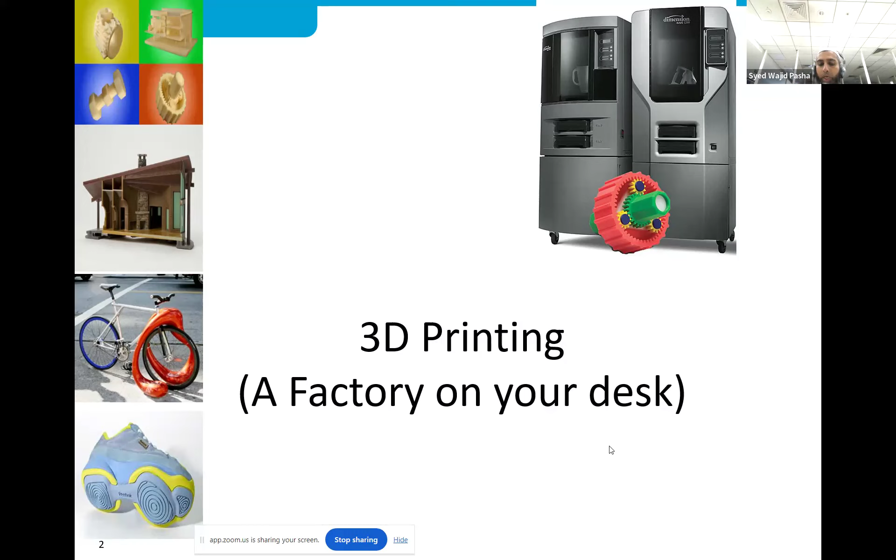3D printing - we can call it a factory on your desk. So there are 3D printers - what is 3D printing? Initially we'll go with that. If you want to go with the definition, we have different definitions coming out here.

3D printing or additive manufacturing takes a digital input in the form of a computer aided CAD model and creates solid three-dimensional parts through an additive layer by layer process. So if you want to get a core understanding of the written statement, this is what it is.

So in 3D printing, we'll do a 3D design, and once the 3D design is ready, we will convert that design file into a .stl format, and that is one of the formats which normally 3D printing machines take. So once we have that input ready, we can design any three-dimensional designs.

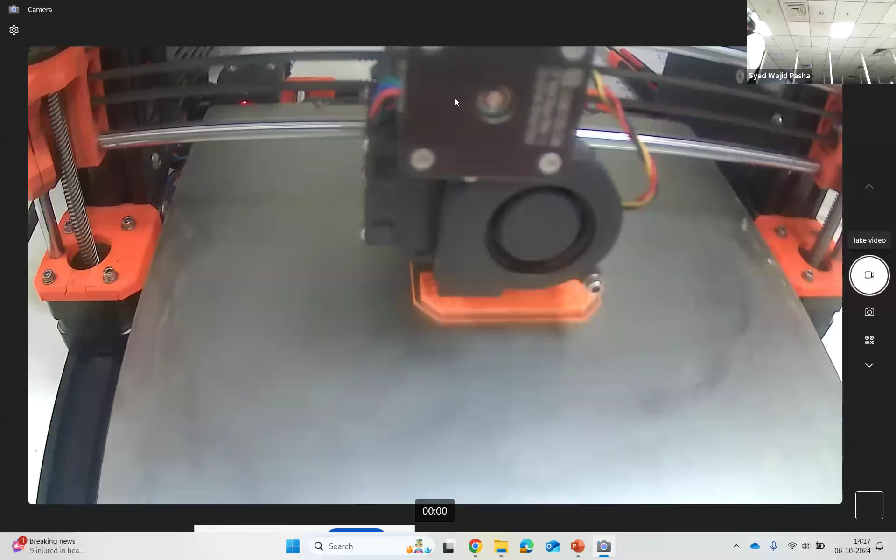And that we can convert into a real model, a live model. When I say live model, maybe I'll just go with camera mode to explain more. For example, one of the parts we have - this particular part, some parts here, and something similar to a part like this is one of the parts with a lot of threads, and we have some parts like this.

So different types of parts - any plastic you can make out of 3D printing. So it is not limited to only plastics. We can print metal, we can print houses, and we'll go deep into that as we go forward with the subject.

So it is a design file, any three-dimensional design file, which can be converted to .stl format, and that will be input for the machine. Once we take that input, that will be converted in the slicer. There is one software which slices this 3D model into a number of layers, and through the slicer we can slice it into multiple pieces.

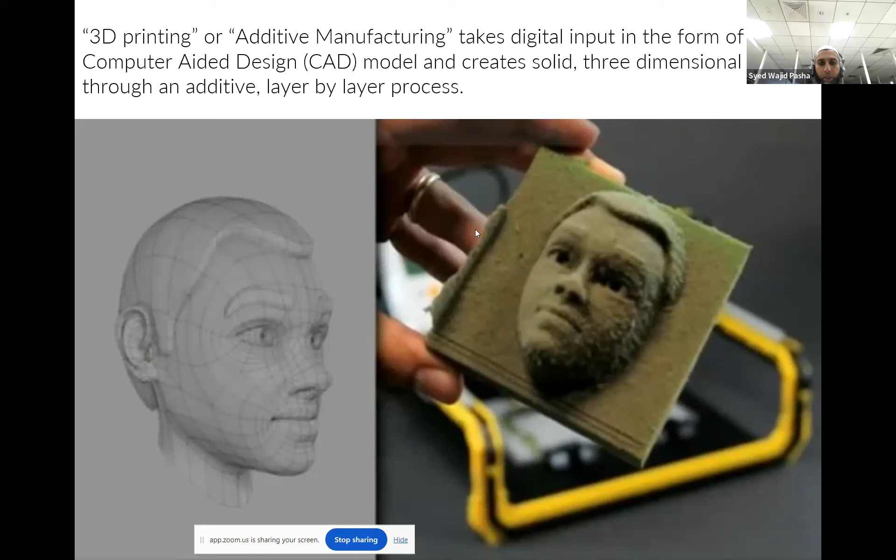That's where it is taking the CAD model and creates solid three-dimensional parts through an additive layer by layer process. What it does is additive manufacturing. When we say layer 1, layer 2, layer 3, like that, it will continue filling layer by layer to print one complete model. Okay, so that's what it is.

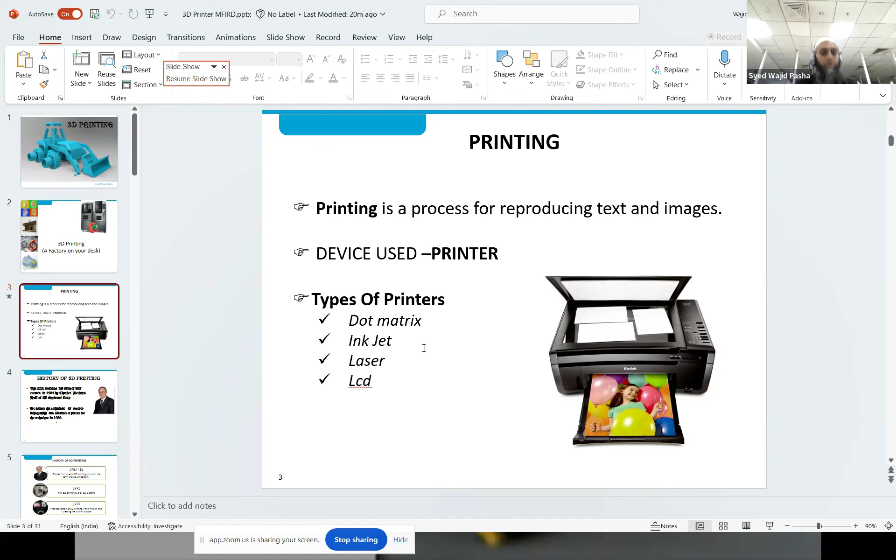When we say printer, normally our thinking goes to the paper, because we have thought printing means a paper which is having some text written on it or some images on it. That's how normally thought goes, but that is not what it is. It is a complete 3D part, which I had shown you some models as well. So it is a part, a 3D part. That's what we have to understand.

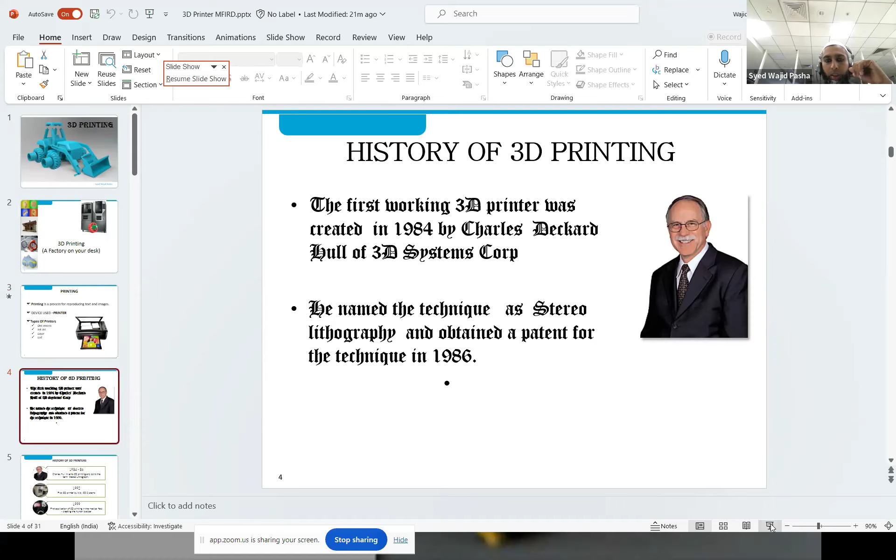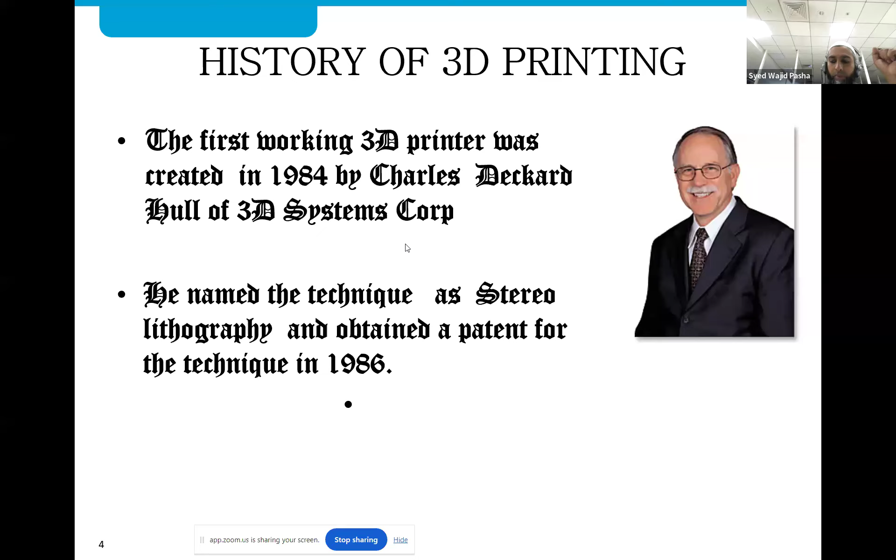The first working 3D printer was created in 1984. Let me go to the slide. So it was created in the year 1984 by Charles Deckard. He was from 3D Systems Corp. So that is where it started, and now everywhere we see 3D printing. People are talking about 3D printing. So just to have a brief history about 3D printers.

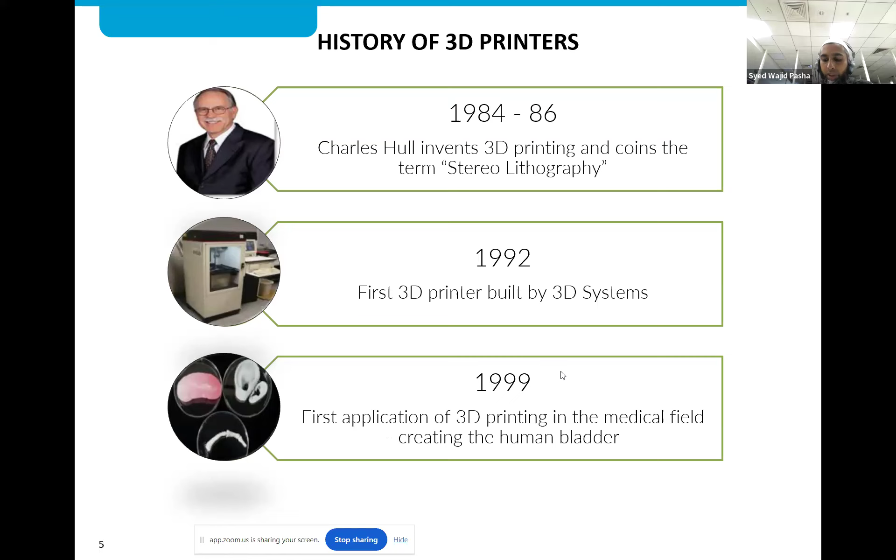In 1984 to 86, 3D printing was called stereolithography, and that was done by Charles Hull. Then in 1992, the first 3D printer was built by 3D Systems, and then in 1999, the first application of 3D printing in the medical field, creating a human bladder, started. So today 3D printing is even in the medical industry. Here we have some history wherein a miniature human kidney was created through 3D printing in the years 2000 and 2006.

SLS. There is something called selective laser sintering machine printing. There are three different processes. One is FDM, that is fused deposition method, which I'll go into in detail when I go to that slide. And one more is SLA and SLS. These are the three different methods we normally use in 3D printing.

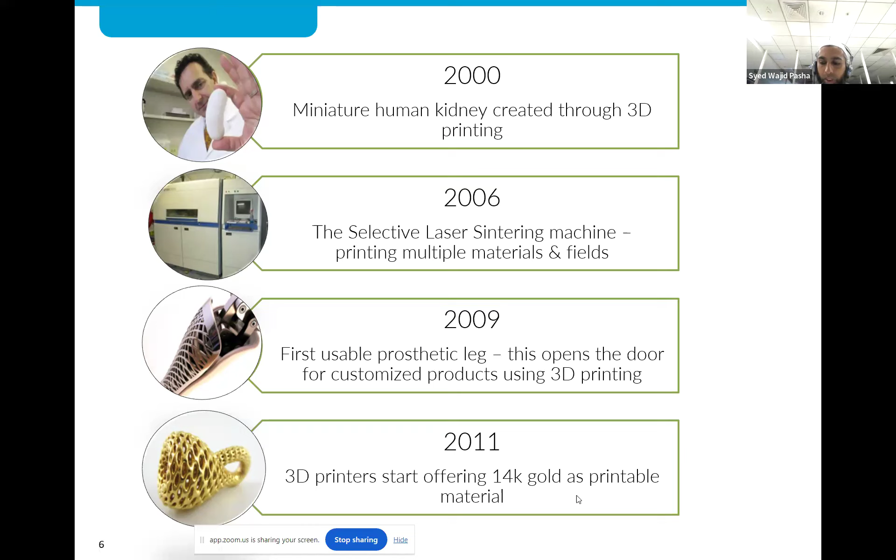And in 2009, the first usable prosthetic leg was used. So this opened the door for customized products using 3D printing. And in 2011, they printed 14K gold also. So 3D printing is there in the jewelry industry as well. This was the projected growth, and I have to put the next growth chart. This was the previous growth which happened in 2012, 16, and 20. 300% in the next 7 years is what was expected.

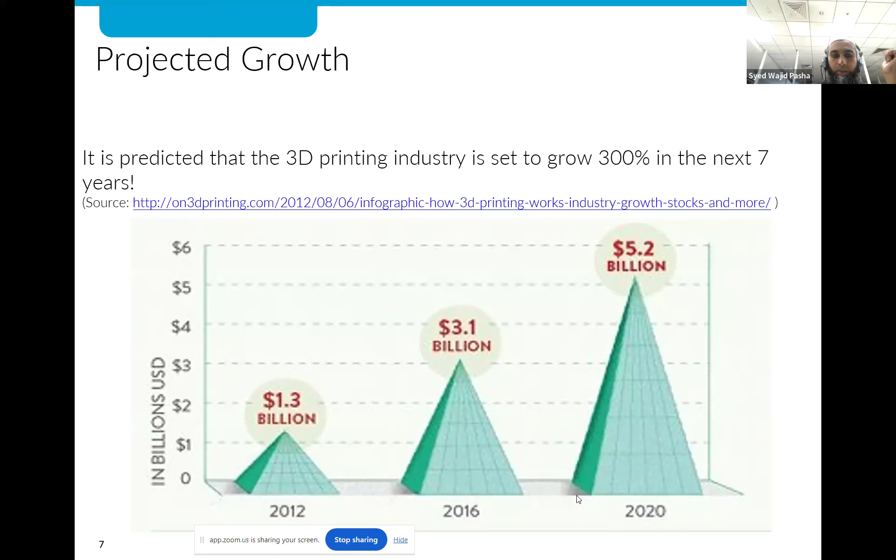Okay, so here I was telling, we'll have the first 3D model design created according to the requirement, whatever part we want. Accordingly, we will design it. Then we'll send that information by converting the file into .stl format. We'll send that file to the 3D printer. Once that file is sent to the 3D printer, we will have one more software called slicing software. Using that, they'll slice and push the G code to the machine, which the machine takes to further form the different parts.

The printer forms the item by depositing the material in layers, starting from the bottom layer onto the platform. In some cases, light or lasers are used to harden the material. So here, the process they are showing is the fused deposition method. This is the bed area, and the first layer will be sticking to the bed to be firm on the bed. Then further layer by layer printing will keep happening.

You will see the video once this PPT is over to have more clarity. I'll be showing you how it is sticking to the bed and what the layer by layer looks like, and also what the finished product will look like, and what different items we can print using this.

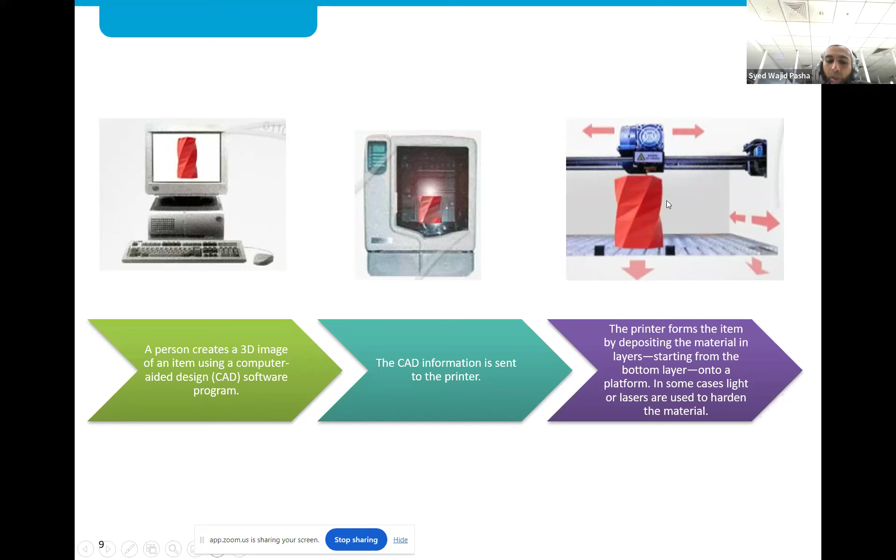Okay. Is anybody having any doubts? Maybe you can ask in the middle also. I don't mind answering. So this is, yeah.

For example, this is the spool filament. What is the raw material for this 3D printing? The raw material for 3D printing is a kind of wire-like plastic, and we'll have a spool. Most of the time what we use is 1.75 dia filament, which is rolled onto the spool, and that is passed through here. This is the hot end nozzle. So you'll have a hot nozzle here, and the filament will pass through the nozzle. It gets melted at around 200 or 210 degrees Celsius.

Different materials can be used for 3D printing. PLA is one of the materials which is commonly used. Polylactic acid is its full form, and there is something called PETG and even ABS, and there are multiple different materials, like PEEK, in the market which we use for 3D printing parts. Okay, so from here, the material gets heated up and melts, and it gives the shape.

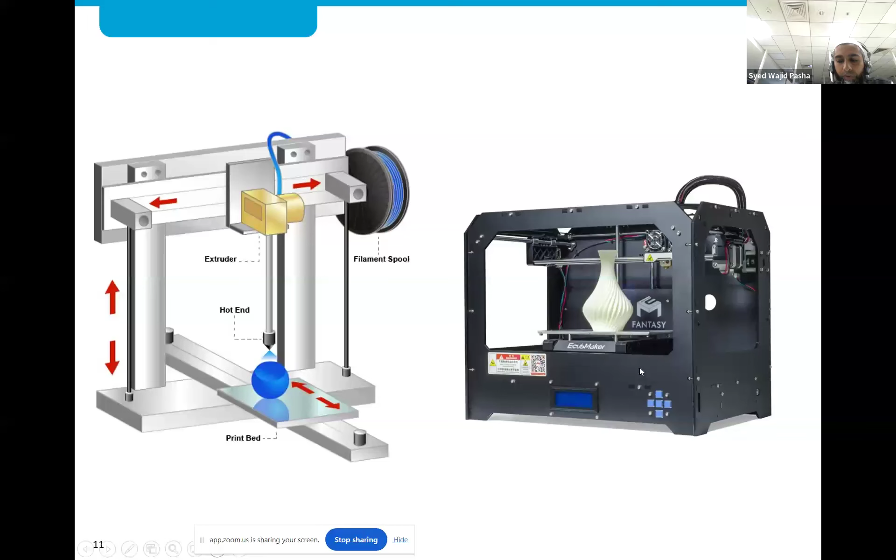What can we do here? Something called concept modeling. For example, if you are working in the construction industry, you are an architect or a civil engineer, you want to show how the house looks once it is constructed. You want to show the live model to your client. You can have a 3D design done, and if you want to show the inside rooms, the bathroom, how the steps will come, you can take a cut section and design it that way, and you can 3D print and show a live model to the client when you go and meet.

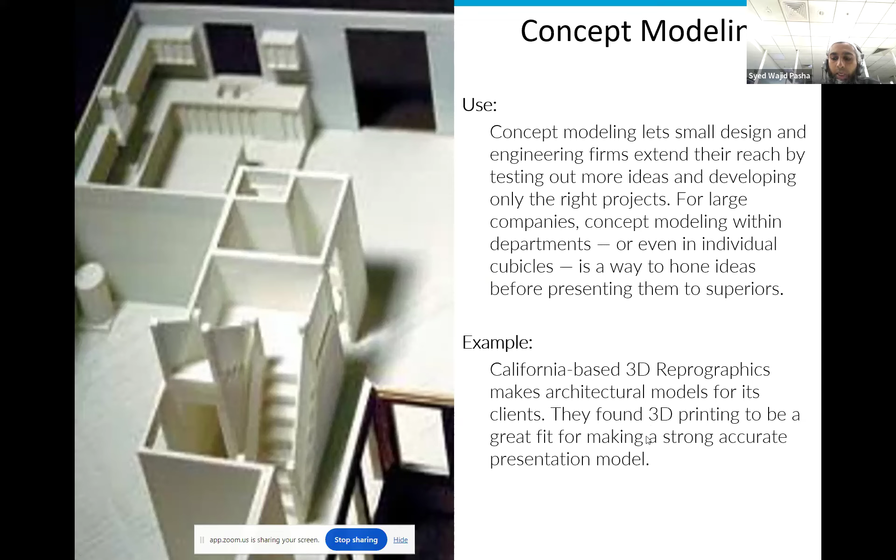This is the concept we give, and this is where your dining room will come, this is where the hall is, and this is the kitchen and bedroom position, all that. Everything you can show. That gives a more positive impact when you go to the business with the model and speak. So we can use 3D printing for explaining concepts to clients, and for functional prototyping.

So for example, you have a car and you want to see if all the functional parts are working fine. Maybe not all the areas, but most of the areas wherever we can go with 3D printing. For example, some of the parts, if you want plastic parts for some quantity, there is no other option. Mass quantity means you have to go for injection molding. Minimal quantity means you have to go with prototyping only.

So if you want to go for injection molding, for one part, to make the mold itself they'll charge 60 to 70,000, sometimes 2 to 3 lakhs, and that will be suitable to produce 1 lakh or 10 lakh components. If you want a prototype where you just want to check whether the fitment is fine and the basic functionality is working or not, you should have something you can readily print and check the fit. So those are the areas where we majorly go with 3D printing technology.

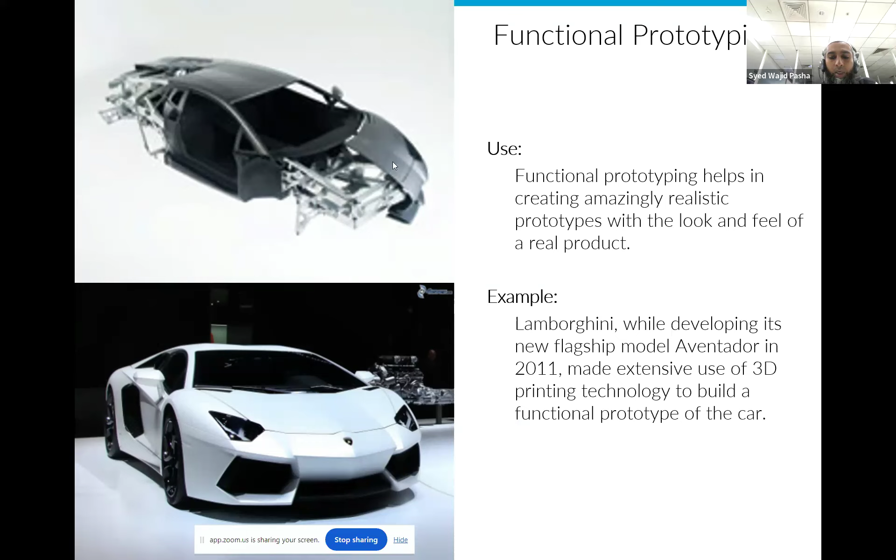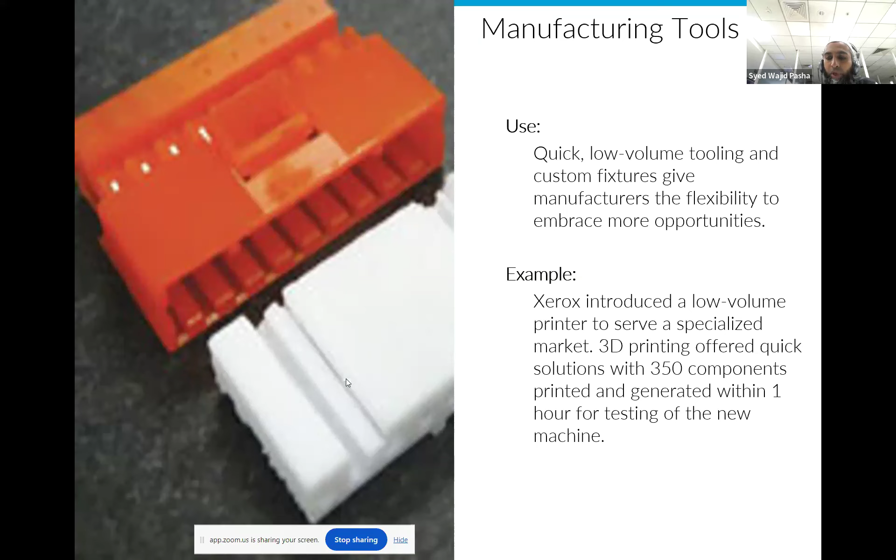So something like these electronic parts, where you want to check whether this connector will fit into another connector and all, we can just print, check fitment and go with it. For minimal volume, up to 350 components and all, we can easily go with 3D printing.

Even in the metal industry, 3D printing metal machines are there, where once you have given the model, metal printing will happen, and that metal base will be fitted to the metal platen, which is there for the 3D printing. So once 3D printing is finished, here in plastic, we'll just put some pressure and the part will come out.

The stuck part. Whereas in metal, when you want to remove the metal from the platen, the 3D printed platen, you have to go for wire cutting. Go for wire cutting, do the EDM, means wire EDM machining, to remove the part from the bed, from the platen.

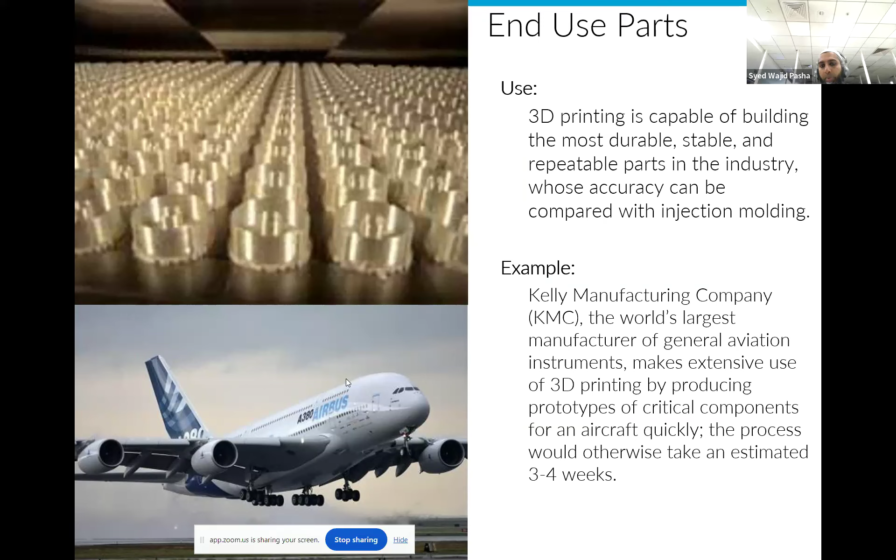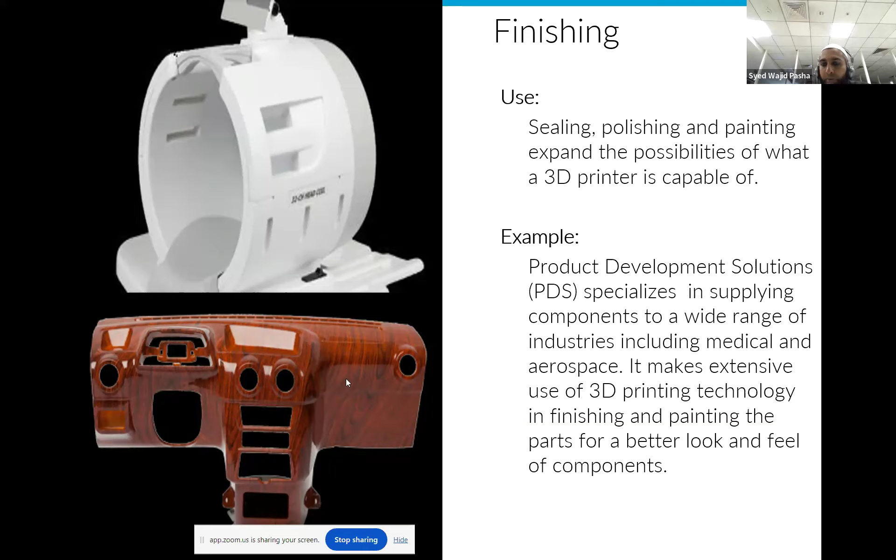Okay, so like this, if you want to have a good finish after printing, you have to go for secondary operations, and then you can use spray to get nice finished products as well. So sealing, polishing, and painting expand the possibilities of what a 3D printer is capable of. So that is one more thing.

What are all the applications? So we can use 3D printing in the medical industry, food industry, gaming and entertainment industry. If you want to have your own designs and you want to put hands on and check, for that we can use it. And pop culture, defense and space, fashion and retail, like this the agri industry is there, the jewelry industry is there, and medical, especially on the bone side, ortho and dentistry. 3D printing is abundantly being used.

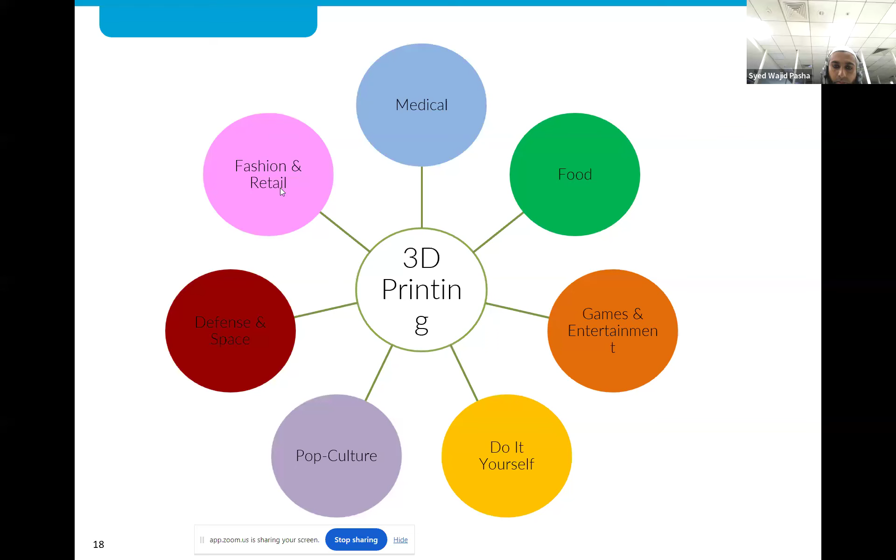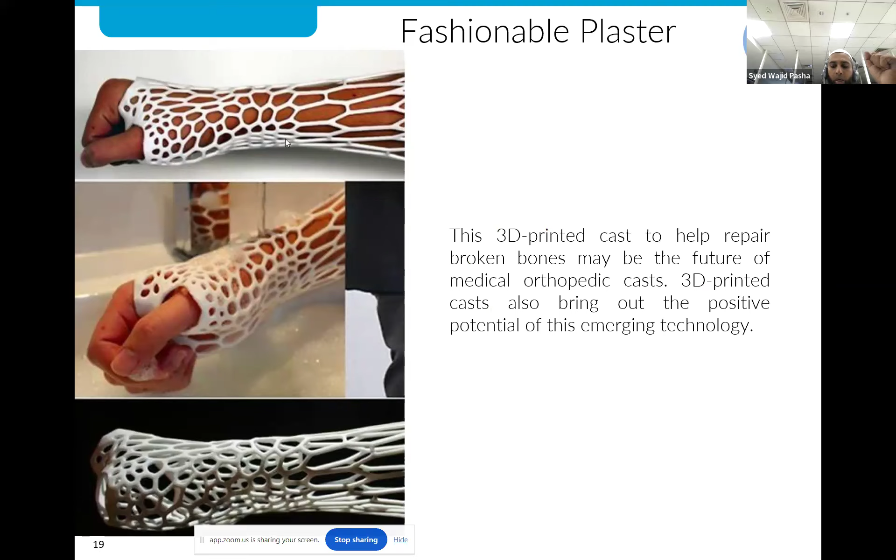Even in construction today, we have houses being constructed with 3D printing machines. Machines will be slightly larger, with a different mixture of input material. So for these different designs, these kinds of complicated parts, if you want to go with plastic and the injection molding process, the initial cost to get the part itself will be so huge that you don't even want to do the trial. Whereas with the help of 3D printing, you can print these items at a very reasonable cost, and at the same time in less time as well.

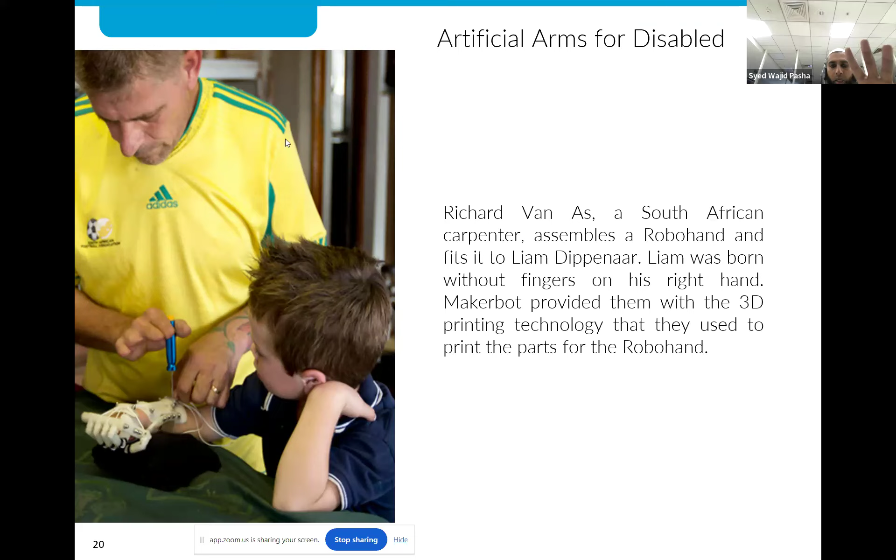So artificial arms for the disabled, you see a lot of robots, arms, and even the artificial arms we can make with 3D printing technology. And these are all data directly taken from the net, and it is authentic data. Okay, so like this the toy industry also, anything you think of, you want to make a design and print, you can easily do it.

This is just to print your home. WikiHouse is an open source construction set being developed. So here they print houses themselves. Even in Chennai or in Bangalore recently, in some news I was seeing, one post office was built using 3D printing technology. In Chennai also, there are some places where people have built houses using 3D printing.

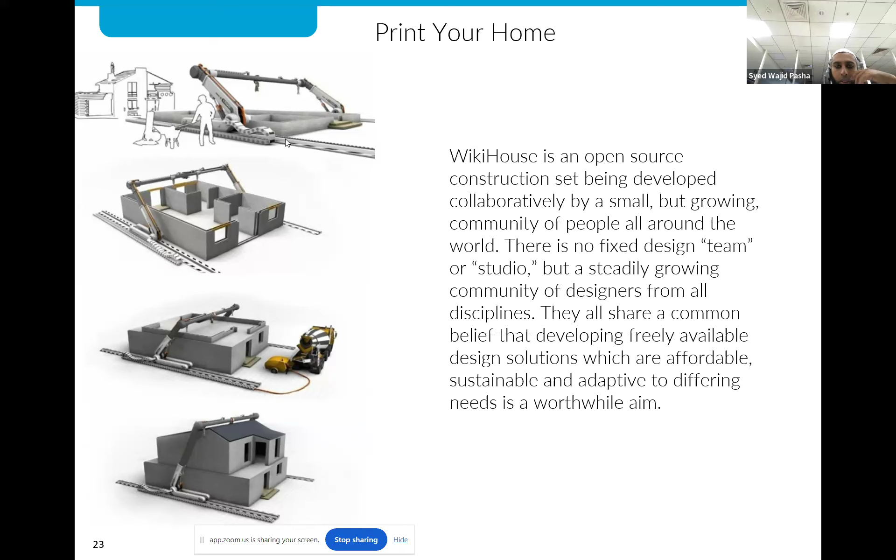One of our friends was in Wayanad, in 2023 or so. We met him, and he was telling, "I have my 3D printing setup for construction at Wayanad." So people are constructing homes using 3D printing technology. For food also, the input material will be different. They are going with the technology to have different shapes of chocolates and stuff like that.

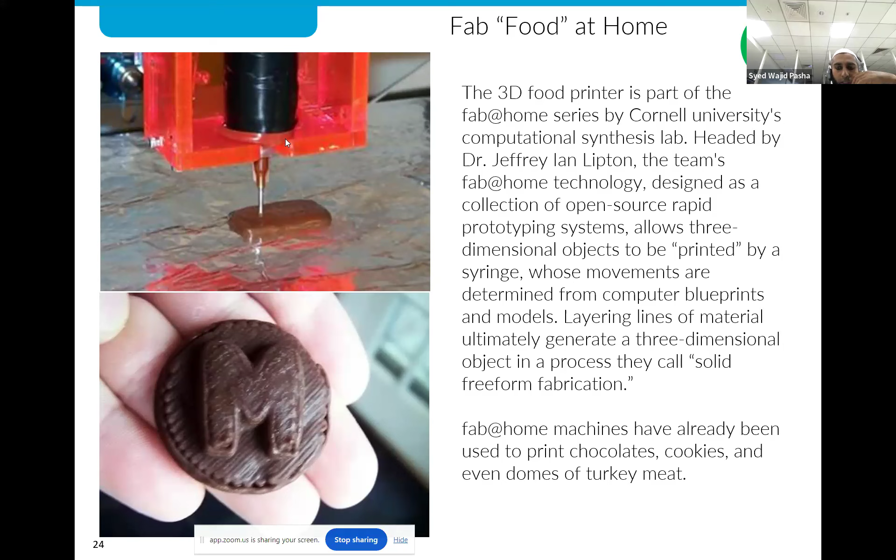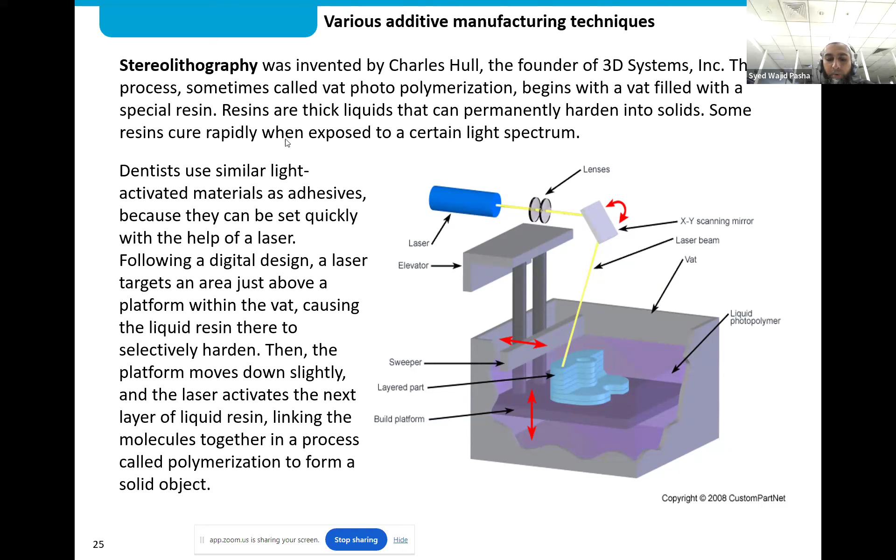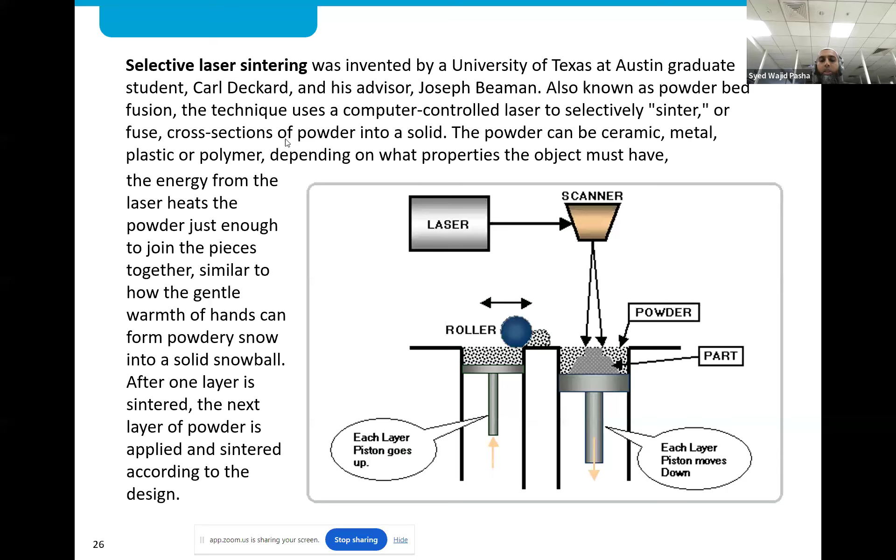laser light falls onto the fluid to convert the part as per the required model being input. And the same way, with powder also, laser light will fall onto the powder to convert that powdered shape into solid material. Different processes, and that will give us the right design which you have given as input. So that is the understanding there.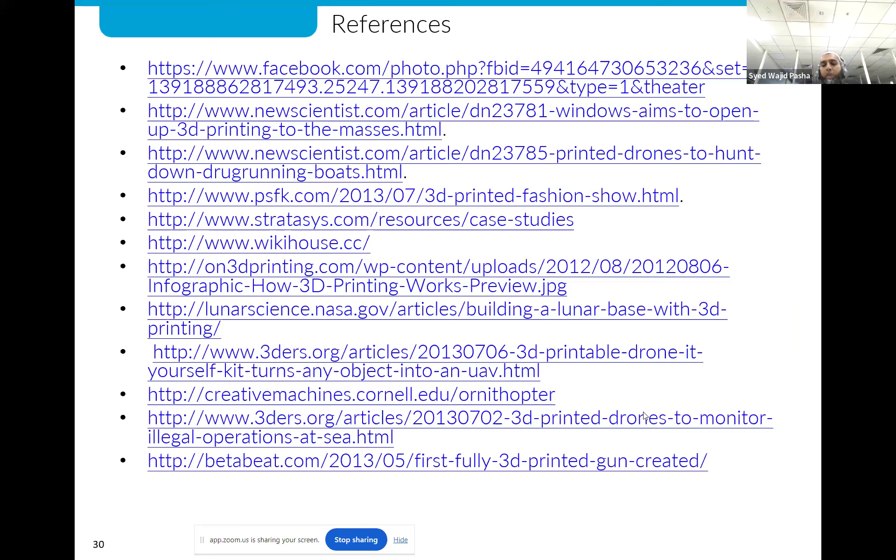What is the future scenario? I think that future scenario is we can use this. If you have the understanding of 3D printing, you can maybe go for it. Earlier it was said that it is only for prototyping. Now the industry has grown vast, and people are even using it for some quantity of production as well. We have even used 3D printing for production of up to 1,000 components in some of the areas.

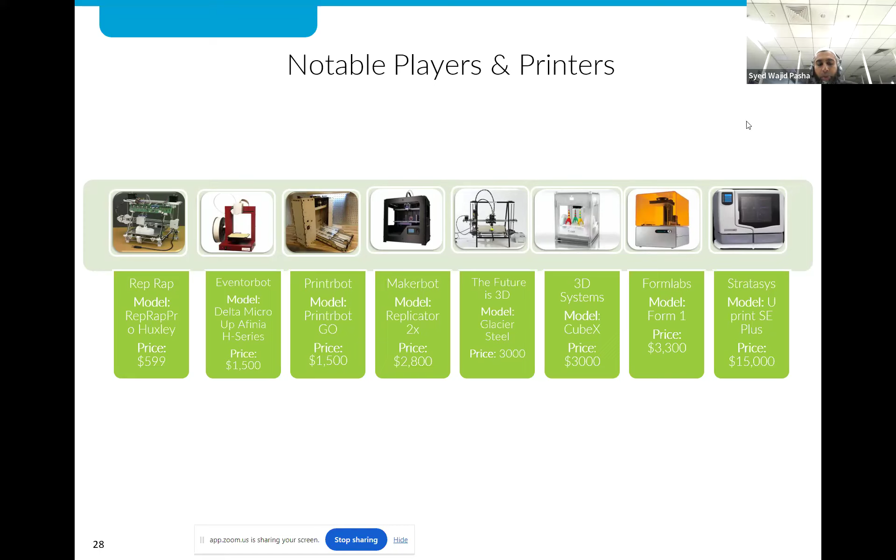Okay, so I'll just go with screen share and explain to you different parts of the 3D printer live so that you understand it better. I hope my camera is visible. You are able to see the camera, right?

So this is the raw material which we are going to have. This will be in the form of a spool, and from that, in the form of wire, it goes to the nozzle, and this is the nozzle area where it gets heated up, melts and falls to form a part.

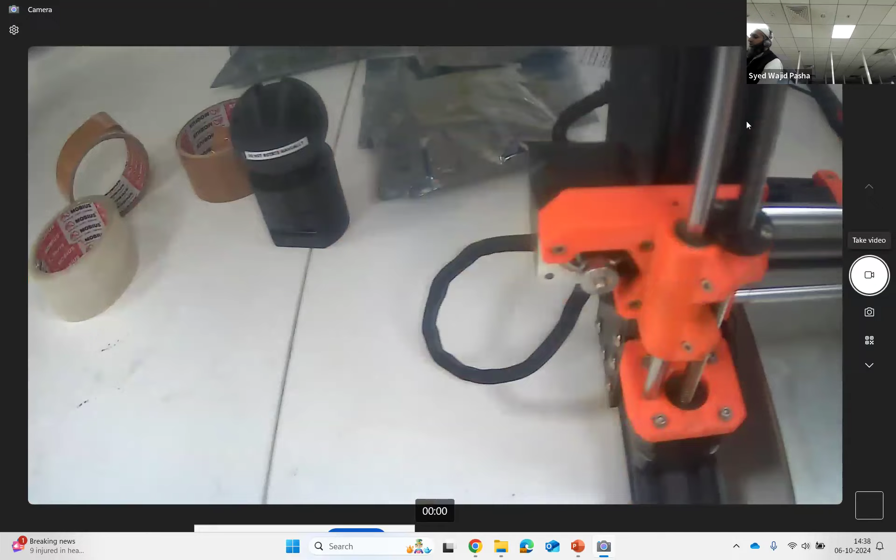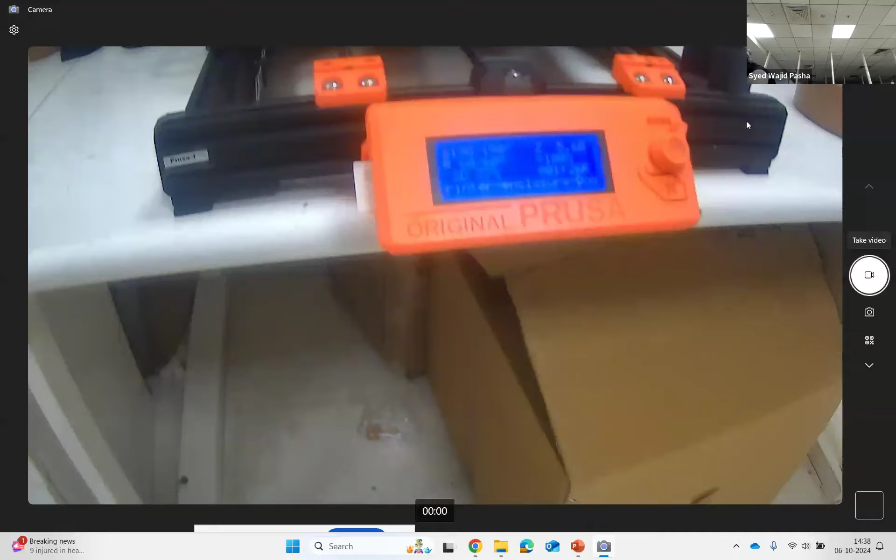This is the x-axis belt, where the nozzle is moving in the x direction, and the y-axis is the bed you are seeing here. You can see the bed moving front and back, that is your y-axis. Z-axis is this complete setup here, which will help the machine to move in the z direction. Okay, so this is the plastic material, and here we have a display which will tell about other details.

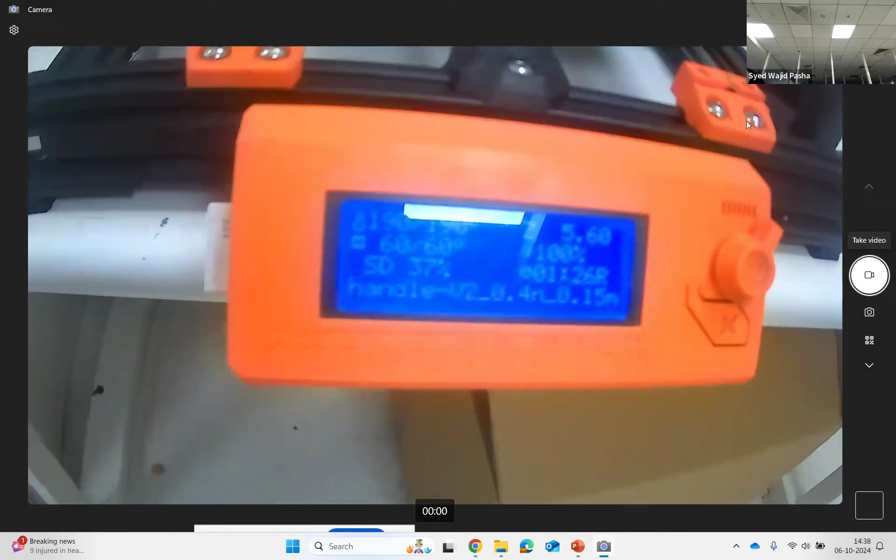What is the temperature? 190 degrees Celsius is the temperature, the bed temperature is 60 degrees, infill is 100%, and the time it takes is 1 hour 26 minutes. It will take more to print, and the item which is getting printed is this. So these are the other details. Z-axis is at the height of 5.6 as of now. Those are the details it is giving.

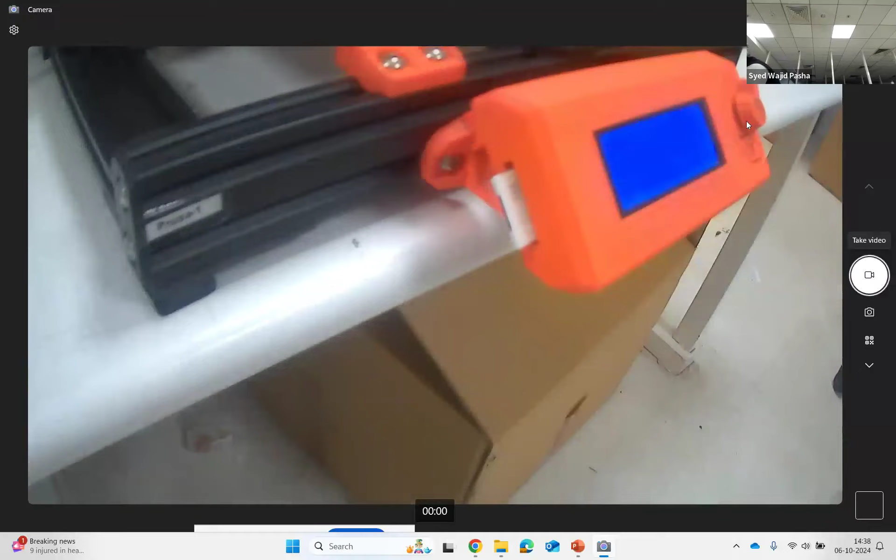So we don't need the system full time. We can take the files on an SD card and simply put the SD card in as an input. Through the SD card it will directly print. We have the SD card here. So at a time, if we have one system, we can have 10 to 15 machines, and this is the complete electronics sitting here on the machine.

Okay, so this is how the machine actually looks. There's the complete look and feel of the machine, and I'll be showing some parts so that you have more understanding of the 3D printing technology and what kind of parts we can print. Give me a moment.

I am audible, right? I hope you are able to hear me and follow me.

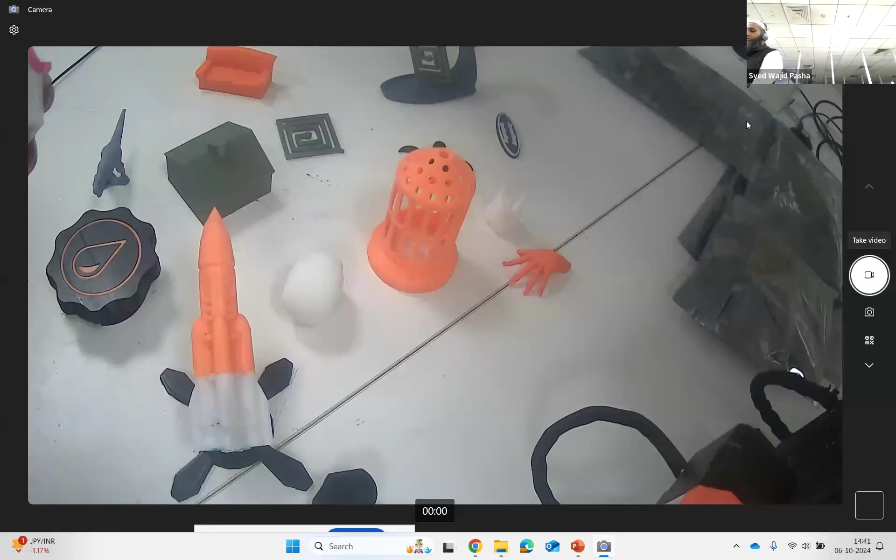Yeah, I have a few parts here. This is just a model of a house. If you want to show somebody the design of how the outside looks, you can print parts like this and show it. Just another model of a house. People from the construction industry can have things printed in this form and share them.

If you are from the furniture industry and you want to show how the sofa looks, you can print like this and show what the final design will look like. And if you are from the jewelry industry, you can maybe print different items like this and show them. We can print, they can put it in the earring and hang it like this. Some different designs they can put in the earring.

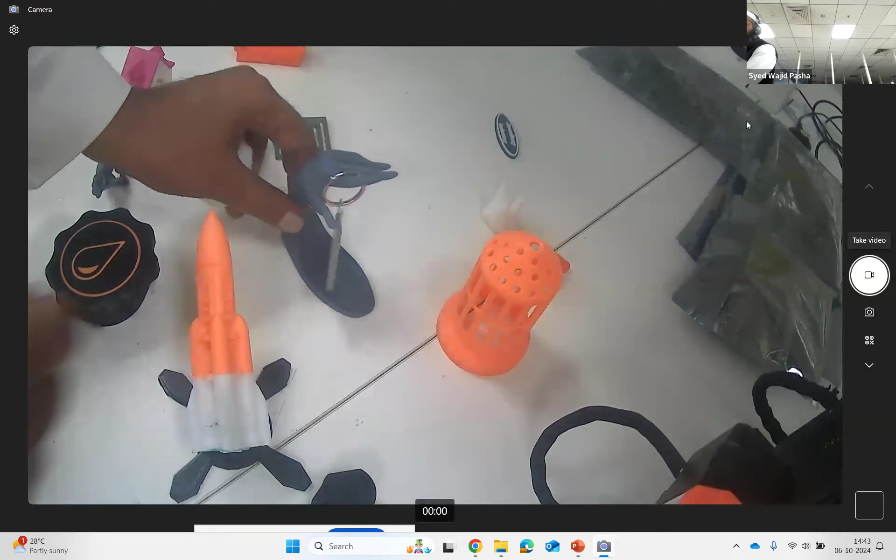And if you want to see, this is what you could call a jewelry stand. So like this you can hang different jewelry on the stand. You can make different stands and put the jewelry hanging onto them. So this is a hand which has been printed, and you can hang different plastic components in the form of jewelry on it.

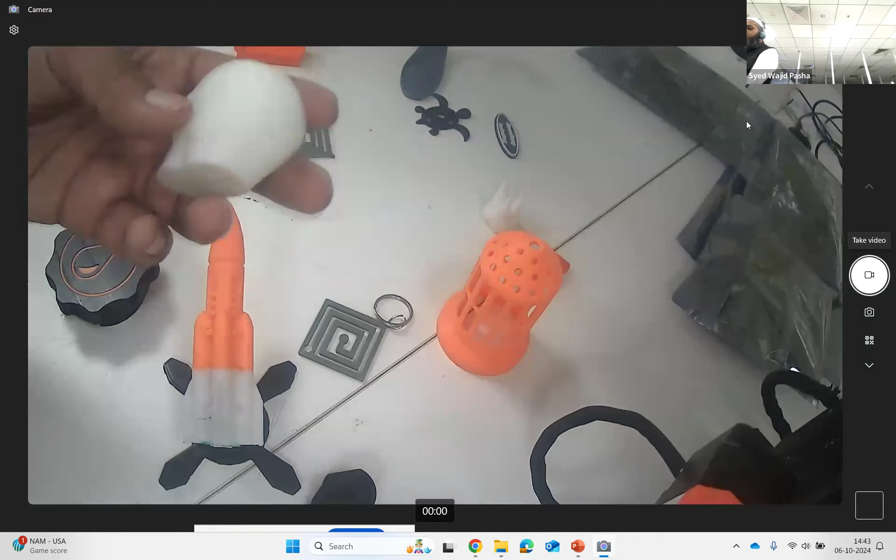And if you are from the medical industry and want to have a skull printed, this is the skull which has been printed. This is for education or some other purpose, but in the core medical industry they are even doing operations using medical 3D printers to fix bone-related and skull-related issues as well. Even in the tooth industry, you can see the tooth being printed.

This one we have just printed in plastic. Otherwise, in the medical industry, you can even use a printed tooth, and they are using it to replace regular teeth.

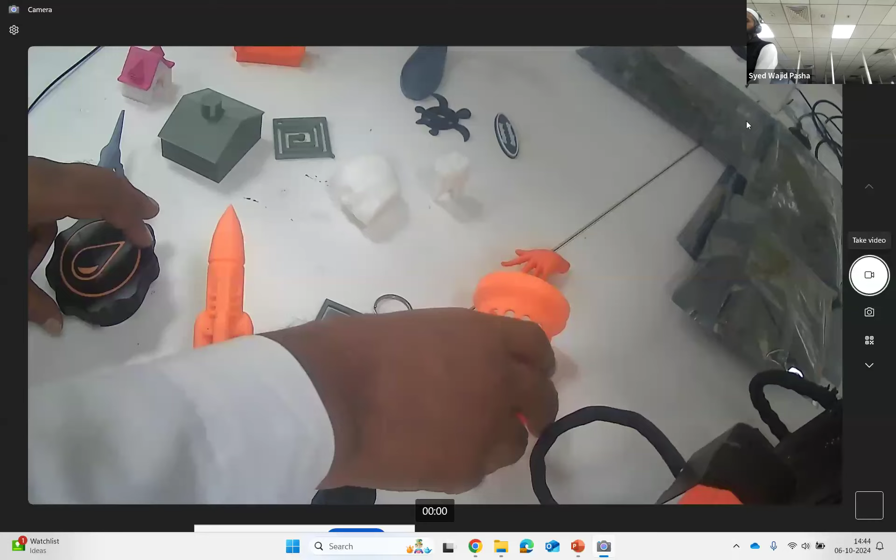And if you are from the agriculture industry, you want to have a pot to be designed. This is one type of pot in which we'll put some round balls, and we can plant inside this one. So this is one of the things. If you are from the oil industry or some other industry, you want to have a knob printed and you want to put it somewhere. So such kinds of designs we can print and put there.

If you are from the aerospace industry, you can print models. This is a rocket design, just as an example we have. You can show it. And if you are from a core mechanical industry, gear profiles and all, you can just print. So this is a vast field wherein we can print whatever related items are required.

For example, if you are from the electronics industry and you have a design thought, you cannot take that bare PCB to the market if you want to sell, so you want an enclosure to be designed. There you can go for an enclosure design, print the enclosure, put the PCB into it, and give the required openings to connect the cable and stuff like that.

If you want to try it out, we have something called Thingiverse. I think I'll close the camera. Go to a website where you can see real 3D printing models. There is something called the Thingiverse website. If you go and type Thingiverse in your system, this is a website wherein you can find a whole lot of different models.

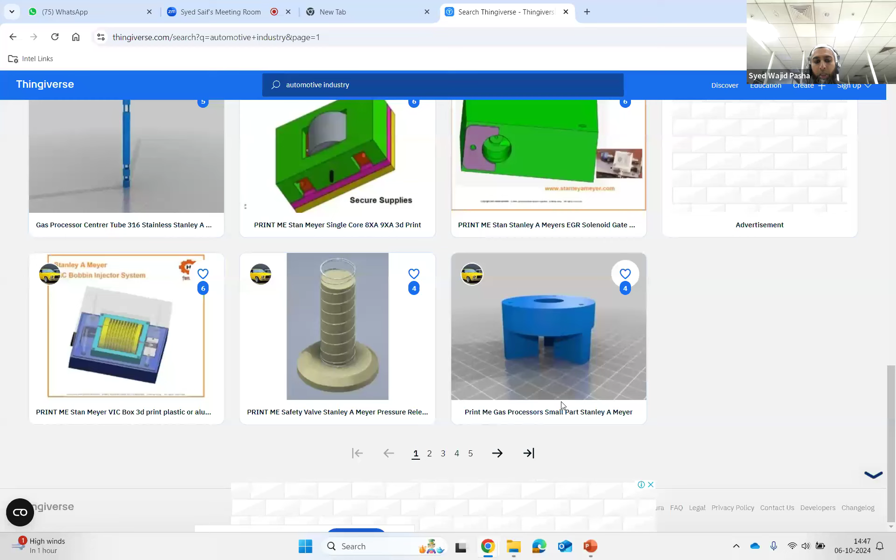So if you want to print, see, all these are STL files designed by somebody and uploaded to the Thingiverse website. People who want to print can print them as per their requirement. For example, if I go for automotive industry, I want items to be printed, so it will search automotive related parts available, and it is giving single parts and assembly parts. Somebody has already uploaded this data, and that data is what we are able to see here, and all these files can be downloaded.

If you want to check how your print is coming, say you have an understanding of 3D printing but don't know how to design, then just to have basic hands-on, you can use this website to check how the prints come.

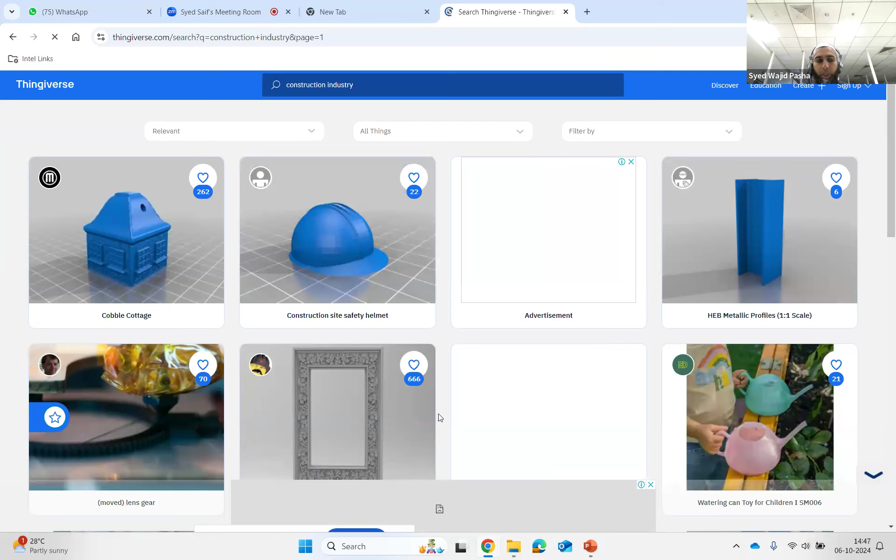If you are from the construction industry and you want to explain it to somebody, you can type construction industry, and it gives stuff related to construction, different types of houses, tombs, and parts and things like that. And this is a spanner, screwdriver, and different stuff. Even the assembly, if you print and assemble all these parts, it will form one complete structure. So this industry is growing enormously, and it is one of the fastest growing industries in today's world.